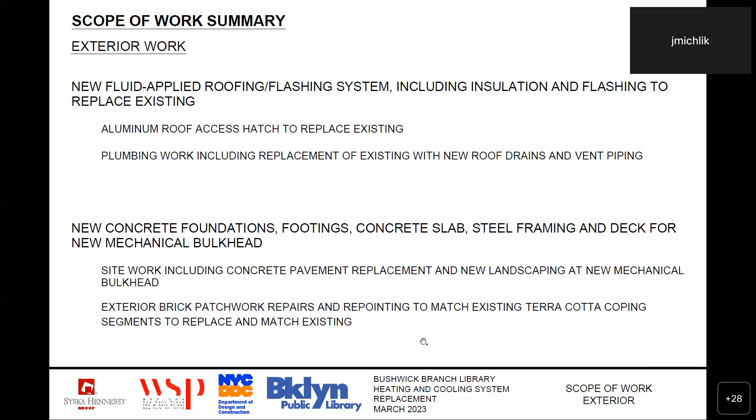Within the space, we're going to be replacing the existing mechanical units in the cellar level with new units, ductwork, registers, and exhaust fans. Some of this will include replacement or rerouting of existing electrical conduits, some patchwork where we need to access the ceiling, and any replacement of ceilings that need to be done.

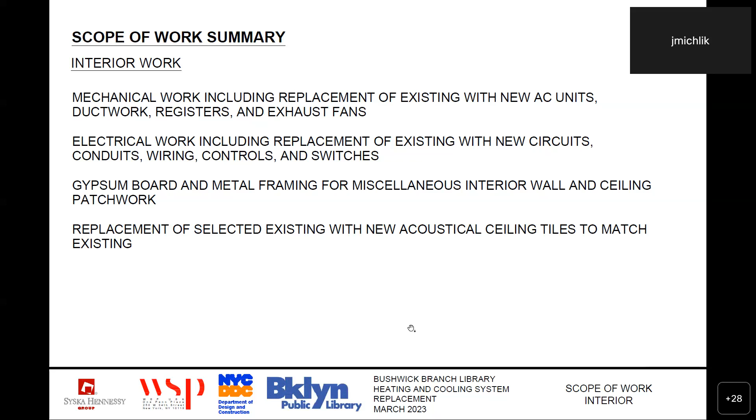We expect to finish the design for this project in the summer of 2023, with an anticipated construction start in spring of 2024, and the construction should finish about 1.5 years later in the fall of 2025.

This is just to give you an idea of the orientation of where the site is located. These are the cross streets here on Bushwick Avenue between Moore and Seigel Street.

What we're showing here is the proposed location of the mechanical bulkhead for the air intake into the building. It currently lines up with the existing mechanical room in the basement. This is going to be off to the side and out of view of most of the street there.

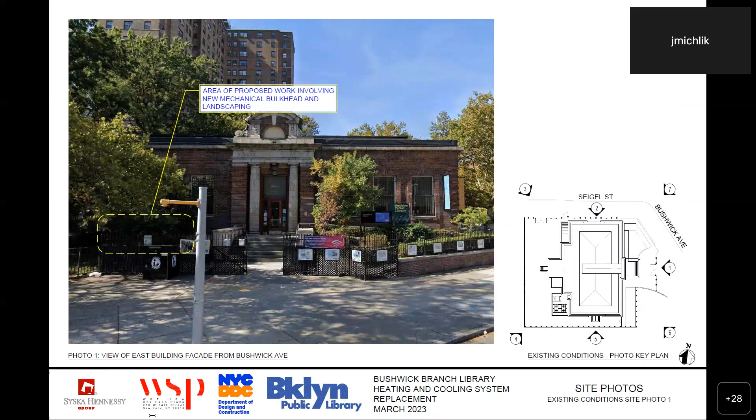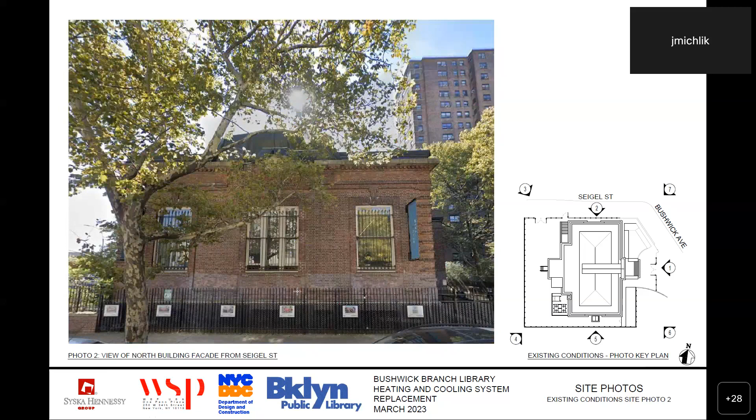Here is a shot of the Seigel Street side of the building, where we're going to be redoing some of the repointing work to clean up the bricking, and a continuation of that onto the rear of the building, back where the parking lot is.

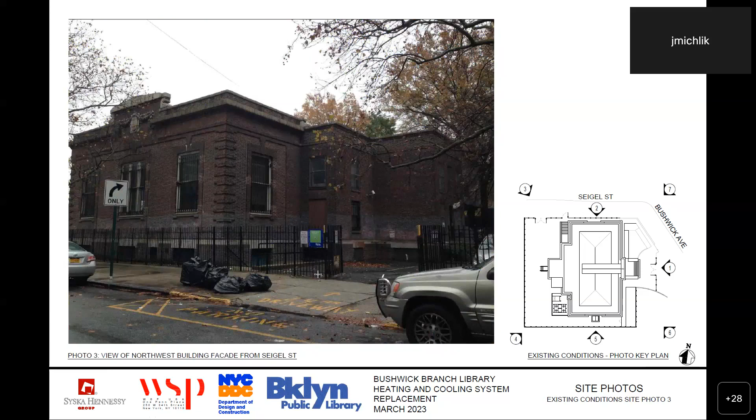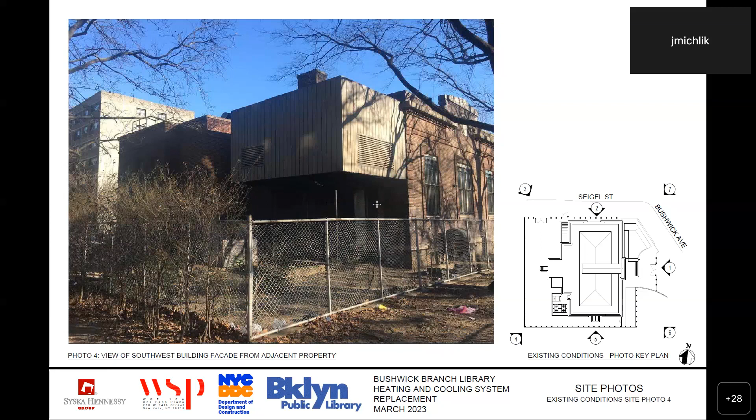This is on the opposite side of the building, closer to the Moore Street side, where the existing porch that houses the air-cooled condensers for the split systems is held. We're going to be upgrading the structural elements to replace any corroded areas there and installing new HVAC units into that porch.

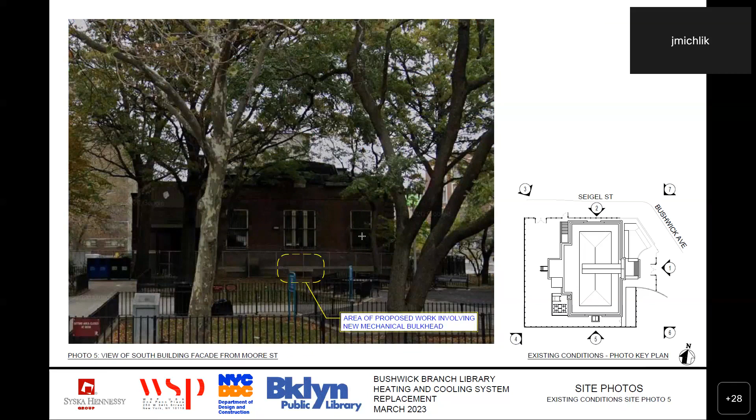Looking a little further on the side of Moore Street, this is where the exhaust air mechanical bulkhead will be installed. So whatever air we bring into the building, we're going to be removing that air from the building to maintain the proper pressurization.

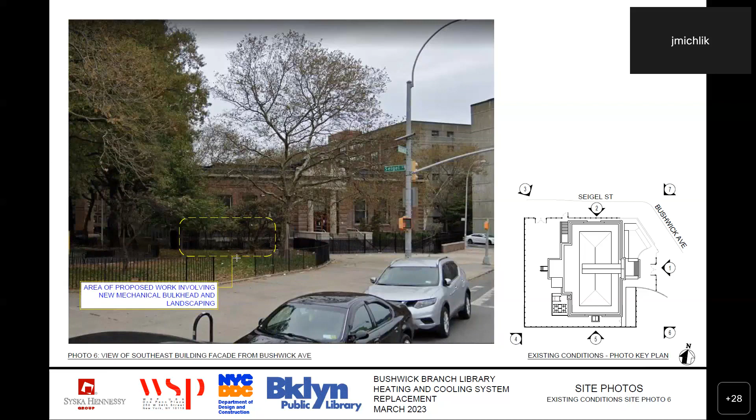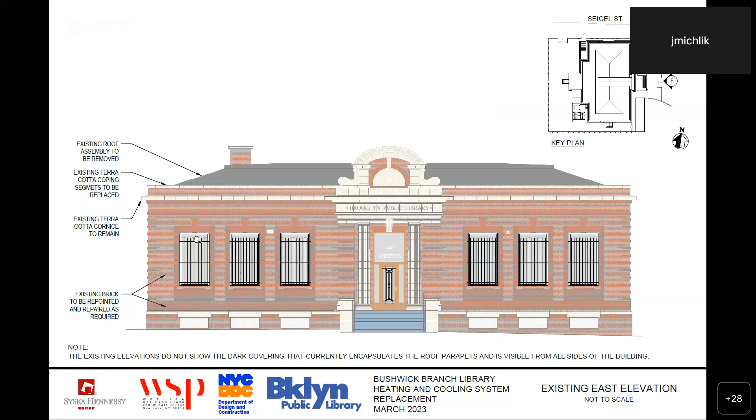These are the renderings of what we're planning to do with the roof. The existing roof will be removed, the terracotta on the coping will be replaced, and existing brickwork will be repointed and repaired as required.

After the roof is replaced, we'll be providing a new roof hatch with a guardrail to give access to the roof for cleaning and maintenance, along with the new roof replacement and new terracotta coping segments.

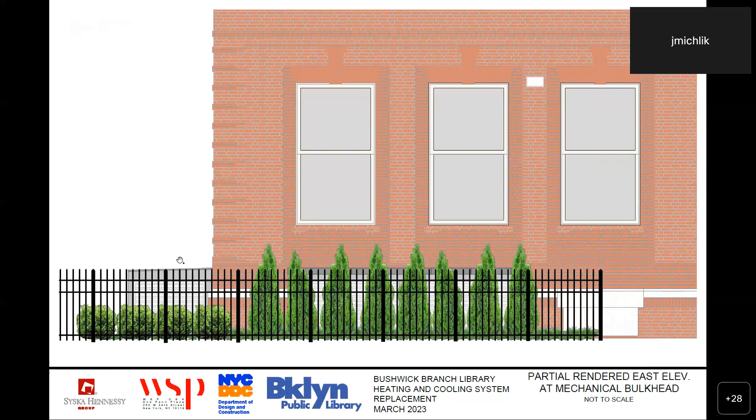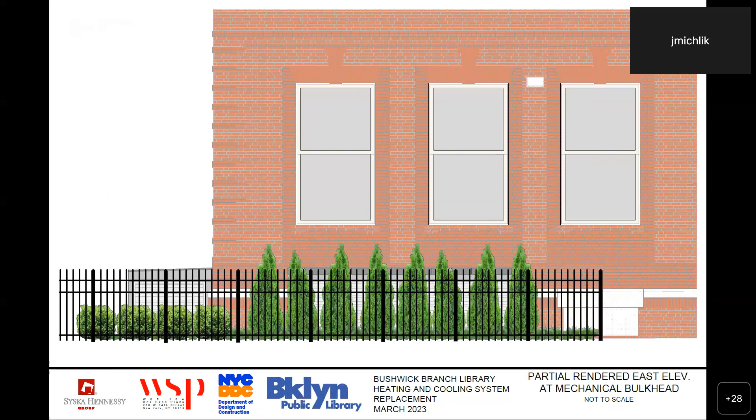This rendering shows where the front mechanical bulkhead will be installed and the greenery, the landscaping we plan to install with it. These will be new shrubbery, skip laurel, and arborvitae.

So these are the key design features. A lot of what we're doing here is to improve the overall comfort within the library and also improve the energy efficiency of the library's operation.

And that is the end of this presentation that I have here right now.

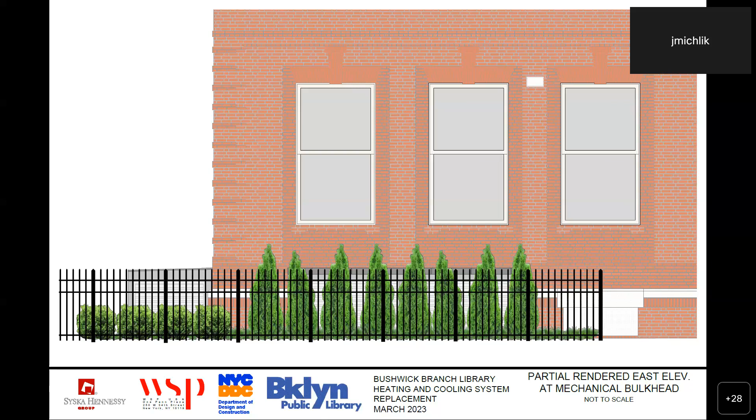Thank you, John. Any questions from the board? Yes, I have a question. Sante Micheli here. Yes, Dante? I don't know if somebody has something to say. Can I? Yes, sure. Okay.

Now, just what's the depth of this bulkhead that you are showing at the front facade? They're about 3 feet. Oh, 3 feet. And what's the height? These are about 4 feet high.

Oh, 4 feet high. No, I was wondering, did you explore the possibility of removing this from the front facade? Which I know you're going to put some vegetation there in an attempt to cover it. But seeing that this is a historic building, is this a landmark building or?

I know that the Carnegie Library in Williamsburg is landmarked. I'm not sure about this one. Yeah, it was a question. I didn't have the time to check. No, it's not a landmark. But beyond that, I was just asking a question.

I was wondering if there was a possibility of not placing this on the front facade. There is the rear facade, which already has a structure, a bulkhead. What is the reason? Is this going to be a split system? What kind of mechanical is going to be there?

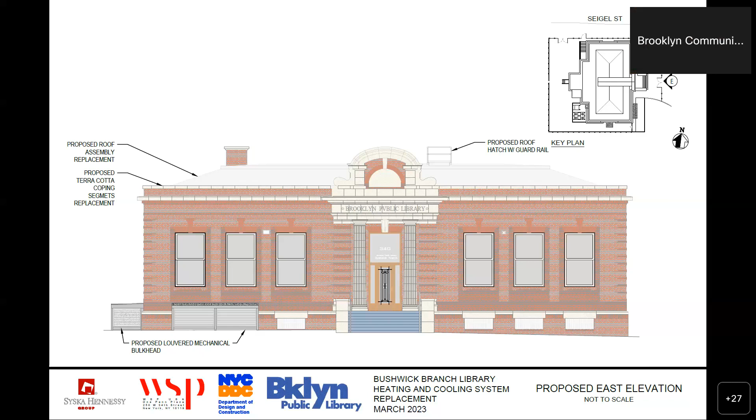12 yes, 0 no's. Thank you. All right, moving on.

So item number 4, 3, and that will be our landmarks application. Yes, Trina, maybe I will do it, and if I need help, can you step in? Sure, and I'll take notes for you, Rosina. Okay, great.

The application for 118 North 11th Street, the proposed work is for recreation of missing windows and the installation of new infill and signage at the ground floor of the Hecla Iron Works building. This is, as we know, an individual landmark property. So do we have a person that's going to present?

Hi, this is Ward Dennis, and I'm here with Sarah Sher from my office. I think I will share my screen and introduce, and then Sarah will walk you through the presentation. Okay, so let me just get that up. Sorry, one second. Okay, I think everybody can see my screen.

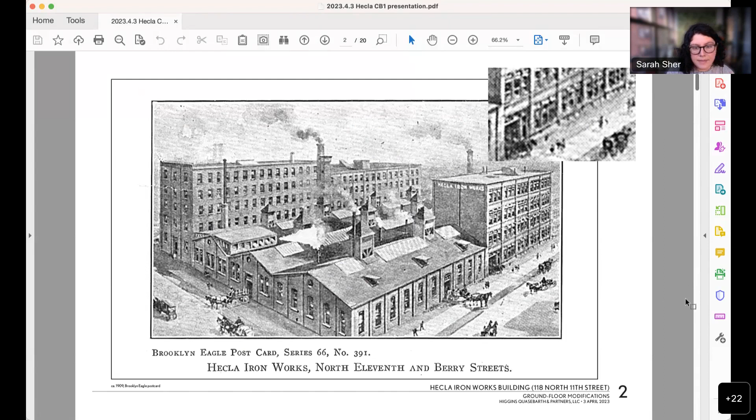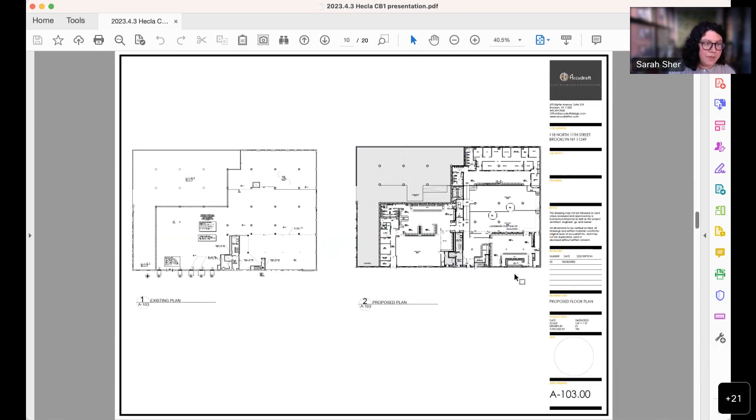So here's an overall plan of the tenant space. That's the landmark building, just the bottom right corner of this sheet. So it's just a piece of the overall footprint of what the space will be. The entrance will be there, and then they'll be part of the area here. We can go to the next slide.

Overall elevations, existing elevation at the top, proposed at the bottom. The top 3 floors aren't part of this proposal, but we wanted to show you the context of the application with the whole building. You can see the restoration work on those center bays, and the recreation of the side lights and stable door entrance. We have basically 3 new door openings for code and access requirements. On the left-hand side, a new door to get into the tenant space, and then 2 egress doors, one in the existing CMU, and then one all the way on the right that's integrated into the infill referencing the stable door design.

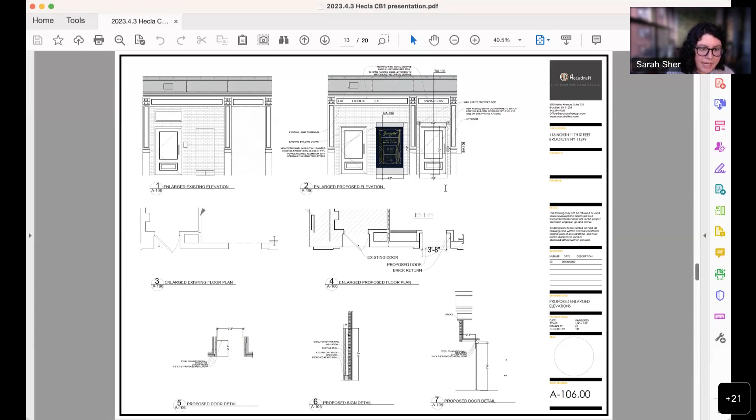And then we have existing and proposed bay by bay, just so you can see the details. The window above the main door is going to be infilled with brick, as it's not a historic condition. The sign panel will be replaced with a new tenant sign, and then we have the new door to match the existing door on the right with brick infill around it, recessed at the same plane as the existing door.

And here we're seeing the CMU existing condition. A new egress door will be added to that existing condition, and then the pilaster will receive a new base, just so it's not floating, a new cast iron base.

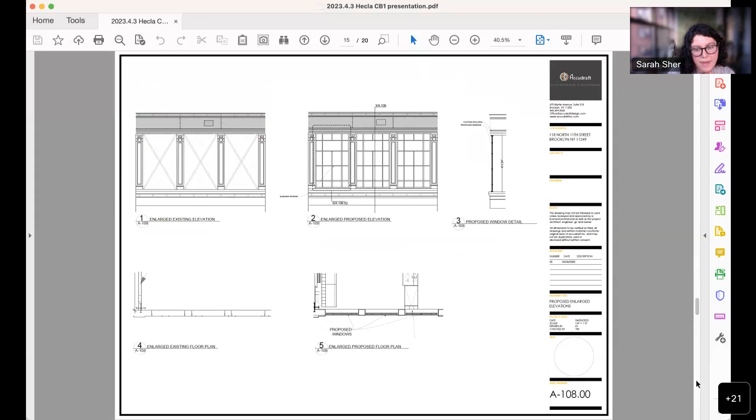Next, here's a detail of the windows going from stucco and steel bracing to beautiful steel windows that are fixed. The next page shows the details. As mentioned, because of all the restoration work on the upper floors, we already have these great drawings of the existing conditions of the steel windows, so we'll be able to duplicate these details with fixed operability for the new ones. You'll see on the next sheet that the details are the same between historic and proposed.

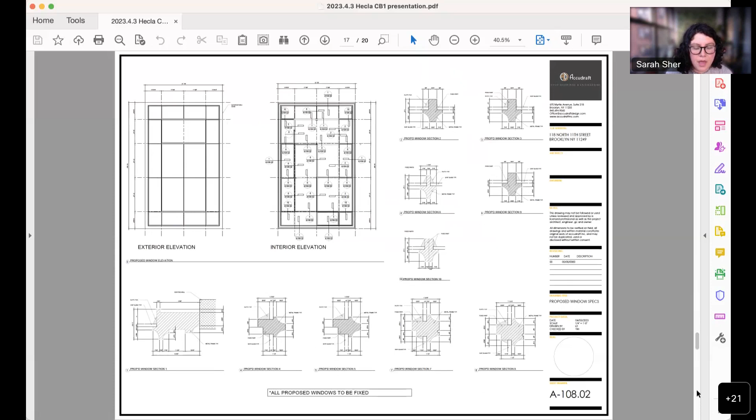And then a detail of the stable door bay. On the left is showing how the roll down garage door blocks the inner cast iron pilasters. Currently, all of the non-historic garage infill will be removed, along with the housing.

The cast iron will be restored with new side lights to recreate the historic bay. In the middle, we looked at lots of different designs, the challenge being to create something that references the stable door infill while also providing egress and meeting code. So we played on the idea of a stable door design and that tripartite system seen throughout the building, to create this metal infill that allows for a door but also occupies the space that currently has nothing in it.

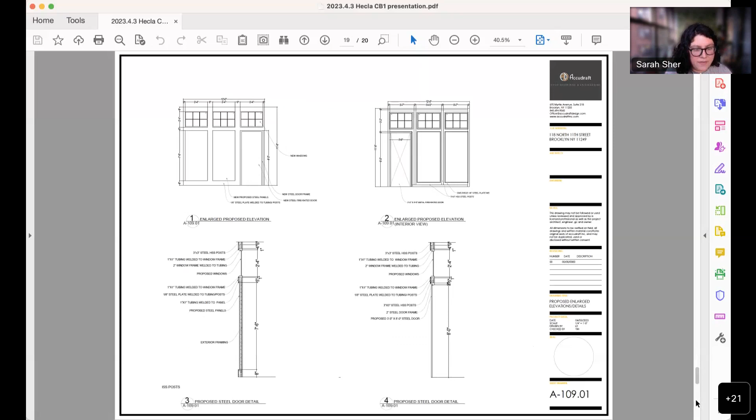I think the next sheet is just interior and exterior elevations and sections. If you want to look at anything more closely, let me know. The next sheet shows the colors of the vinyl decals, the four highlighted in purple, that will be in a mix on the window glazing. Like I said, they're reversible, just stickers that can go on and off the windows. The bottom shows an intercom proposed next to the tenant entrance, attached to new brick. With that, we could go back to an elevation if anybody has questions.

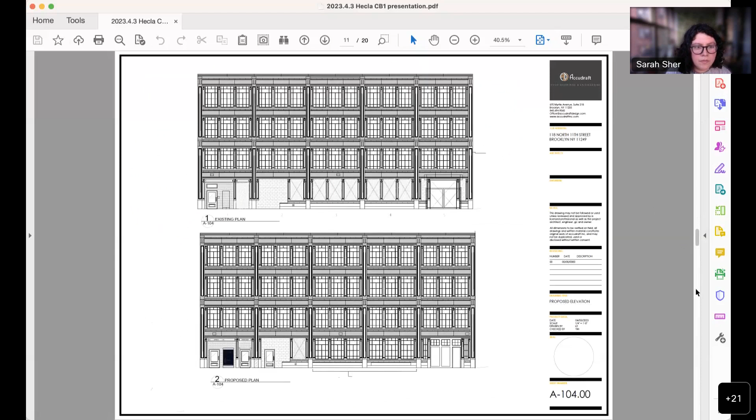I just wanted to add one thing, which is about the windows we're proposing at the base of the building. First, the details we saw were used to replicate missing elements above. Secondly, this is going to public hearing for the windows because we're making them fixed windows, since they're for a storefront. If we were doing them as operable windows, it could be approved at staff level.

I have a question, Simon. Yes, Simon? Simon, yes.

You mentioned the graffiti that was going to be removed. How do you remove that? Does it show the original appearance from when it was built, or how are you able to remove it? There's a variety of different chemical cleaners that remove paint from cast iron. As part of this we'll need to test chemical cleaners. There's also the option of a wet abrasive that can remove paint, but my guess is a chemical cleaner will be able to remove the paint from the base of the building. Okay, thank you.

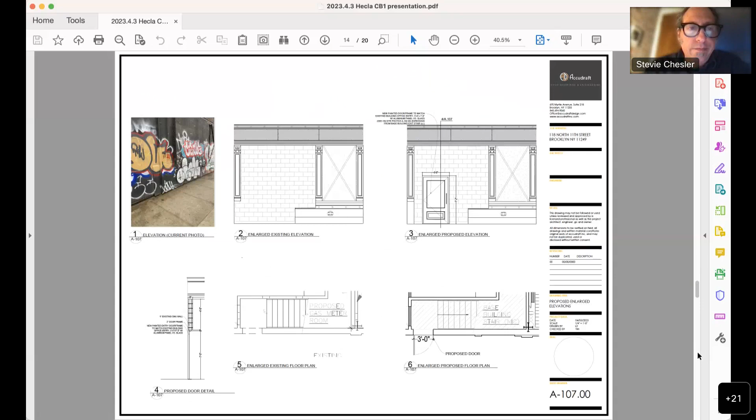Yes, we've looked at many different configurations for this door. It's challenging because it's a proper egress door, so it has to be a door that somebody can push out easily to exit the building. It also has to meet a 2-hour fire rating, so it has to be a metal door, it can't be wood. We've tried to look at a door within what is a wicket door configuration, but nothing was looking quite right.

So we did end up going a little bit farther away from a pure restoration approach to something more contemporary, but in the spirit of the stable door and also the tripartite divisions we're seeing across the building. But yes, we looked at many different options here.

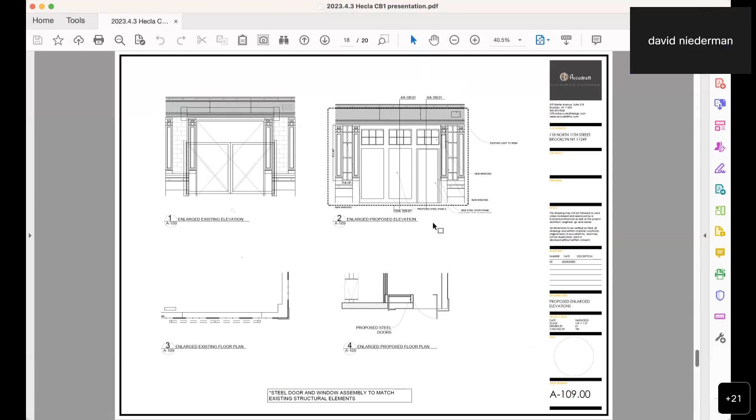Do each of the 3 doors open? I don't understand how, it's just one door. Just one, and those are panels next to it. Oh, okay, so it's just the one. Yeah, right, it's an illusion of actually having 3 doors together.

I have a question too. Yes, Sante? Hi, thank you guys.

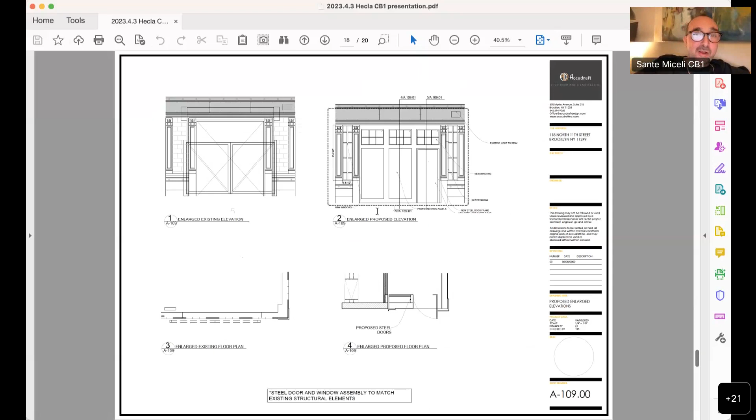Thank you, Ward. Very happy to see that you're going to maintain and recreate the steel window. This building always amazed me, if you know the history of the building - this is a very early, for the time, curtain wall system, if we can call it that way. So thank you so much.

I don't know if the committee member knows, but I'm passionate about this - I had a fabrication business too with my design practice. It's very interesting, they had developed a finish that was part of the metallurgic process of this window, so they were pioneers at the time. They also worked on the Flatiron building, and so many buildings in New York City. So really, thank you for the work.

The only question I have - I'm less disturbed by the carriage, I believe it's a vocabulary in tune with the existing language of the building. The only thing I have a question about is that elevation next to the office where you added the third door, which is kind of paneled, you cannot see those blocks there. But originally, the 1940s tax block photos show us the same series of 3 windows, steel windows. Why are you maintaining the blocks? Why aren't you trying to introduce the door while maintaining the language of these 3 windows? It feels like a little bit of an anomaly to have these concrete blocks there. That's the only thing I feel a little strange about.

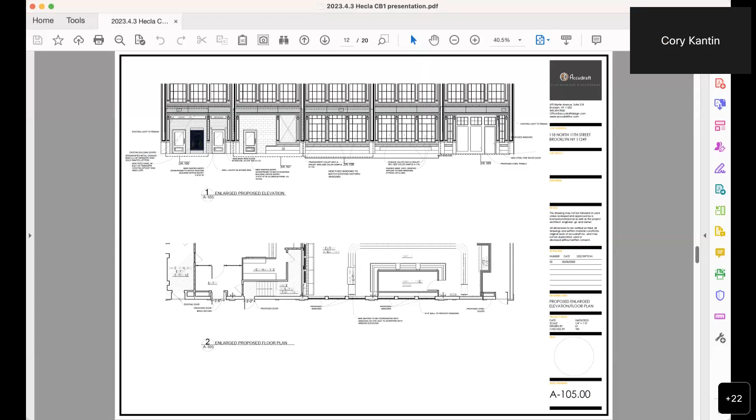A motion was made and seconded, so you either have to rescind it or start a new motion, that's what I'm understanding. No, we can have a discussion on the motion. Did we see that slide? We can ask for a friendly addition to it. Yeah, that's a good suggestion, Trina. Can we see one more time the slide showing the colors?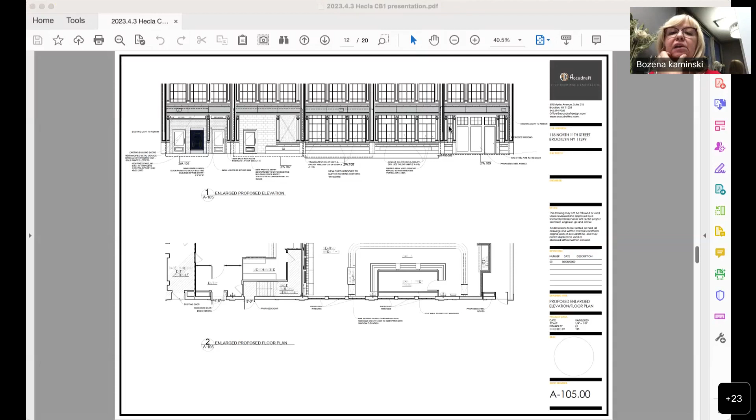Sarah? Ward is controlling. I have control. Oh okay, there you go.

So Ward or Sarah, can you explain how the windows, we're looking at all these different colors, how would that work? What's the plan for using those colors in the windows?

I'm just looking through older materials that have been sent to me from the tenant that might be helpful. Let me just try to send it to Ward and maybe he can bring it up. I just chatted you a screenshot, see if that's helpful. Got it. Yeah, yeah.

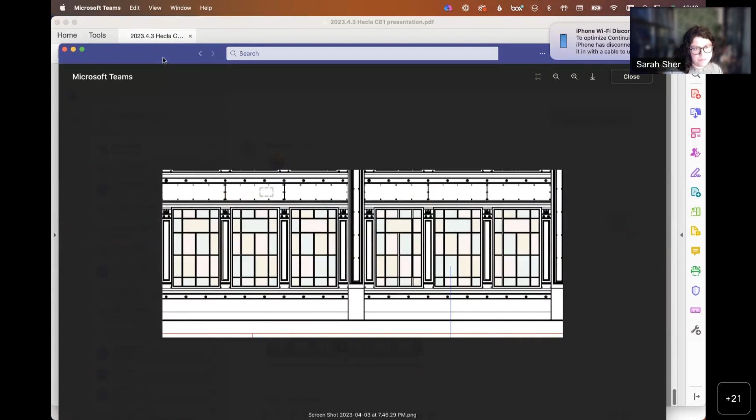So this is what we were... did you see that? The tenant wants to show their concept, sort of this pastel color. Well, I see it's very light.

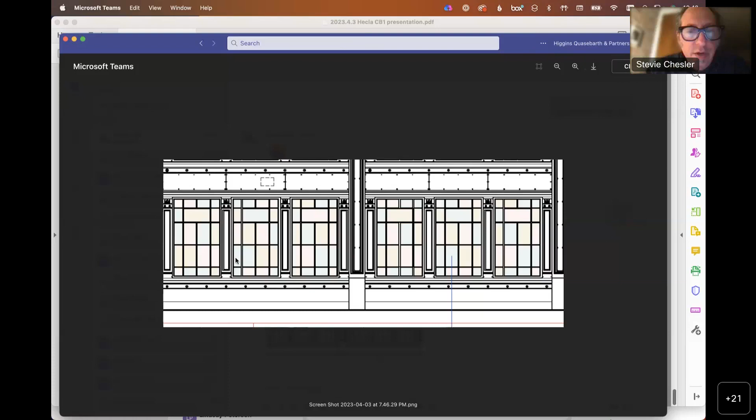Okay. Yeah, I feel like it's definitely less noticeable, but it's still noticeable. Is there color here? I don't even see color on this. Yeah, there's pastel colors, very light, almost like it has a sheen quality to it. Very subtle.

Oh, I see it. Wait, I see. Sorry, I didn't mean to cause everybody vertigo. No, that's very helpful. And will that actually make them not translucent?

Yeah, some will be opaque. The three on the right will be opaque, and the three on the left will be translucent.

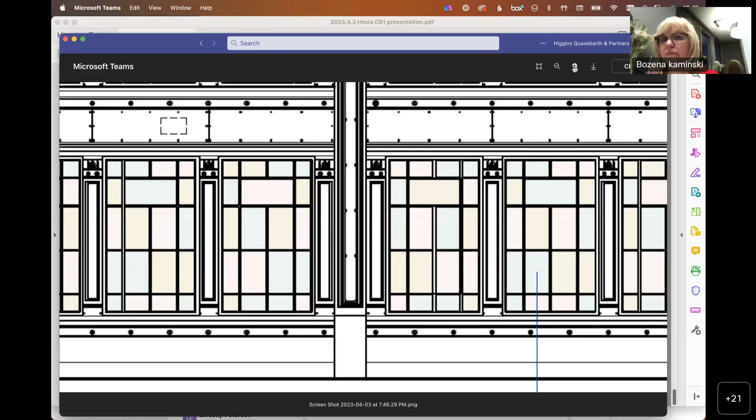Thank you, I appreciate that. I didn't mean to take this meeting out of order, but I feel it's really helpful to see this. And personally, it doesn't bother me from looking at this rendering. I think the rest of the building is a really good design.

All right, so can we go? Is this what they are actually going to look like? This very light pastel color?

That's how it's always been represented to us. We can certainly follow up to make sure that what they've sent us previously is what is going to be installed, because I don't think that was clear before, at least not to me anyway.

Okay, it's different than the little paint chips, the colors that you showed in the presentation. Those colors are much more solid, darker colors. Do you actually know?

I mean, they have other locations. Is this like a signature thing? Is this something someone could look on a website and see, or is this specific to this location? It's their signature colors. I don't know if they've used decals before at their other locations.

Oh, okay. I did look on their website, Keith, and what is on their website is a little bit darker than what you see here, but I also don't want to make a representation — that's their plan.

Okay, so we have a motion on the floor to approve the project as presented, with the understanding that we had a concern about the colors, which was explained to us as being as shown.